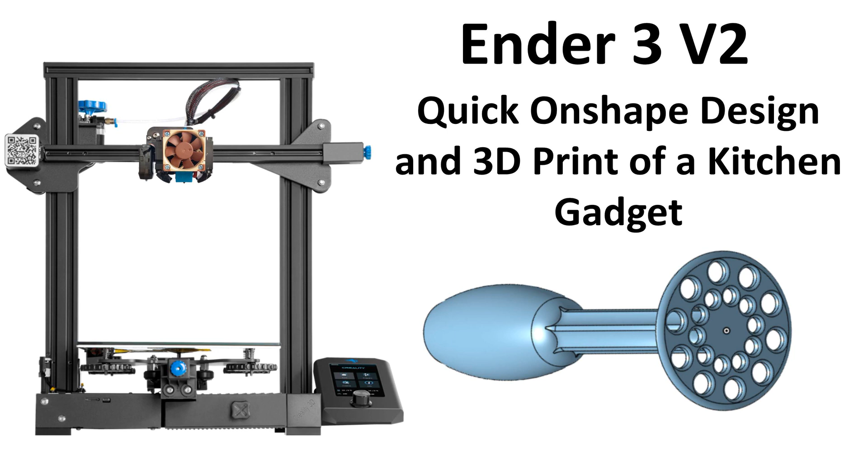In today's video, we're going to be creating a simple kitchen gadget. Every morning I have some berries along with my oatmeal and find myself having to smash these berries using a fork, which is time consuming. And I thought today, hey, you know what? I got a 3D printer.

I'm just going to jump on Onshape, create a simple kitchen gadget that will help me mash these berries in no time. So let's jump on Onshape here. This will help a lot of you guys that are just starting to get into CAD. This is a very simple tool to make.

First thing I like to do is jump on the internet and just try to find some inspiration for my design. I'm looking for something simple that can be 3D printed all in one piece. Something like this, or this one is perfect. So you see this wooden handle here? I like that one. That's a very simple design. It can be printed all in one piece. Doesn't need any supports or anything. So that's what I'm going to do.

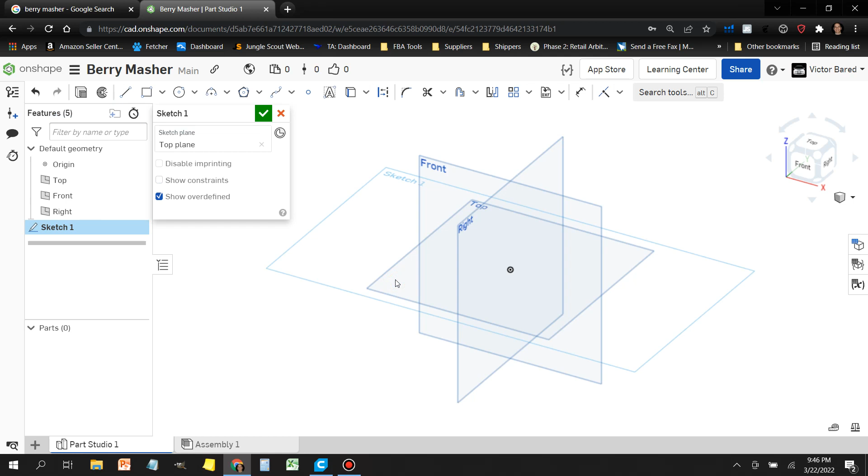Log into Onshape. Change your measurement units to millimeters. And I'm going to start off with a circle sketch. I got this size by measuring the bottom of the bowl. So it's just slightly smaller than the shortest diameter on the bottom.

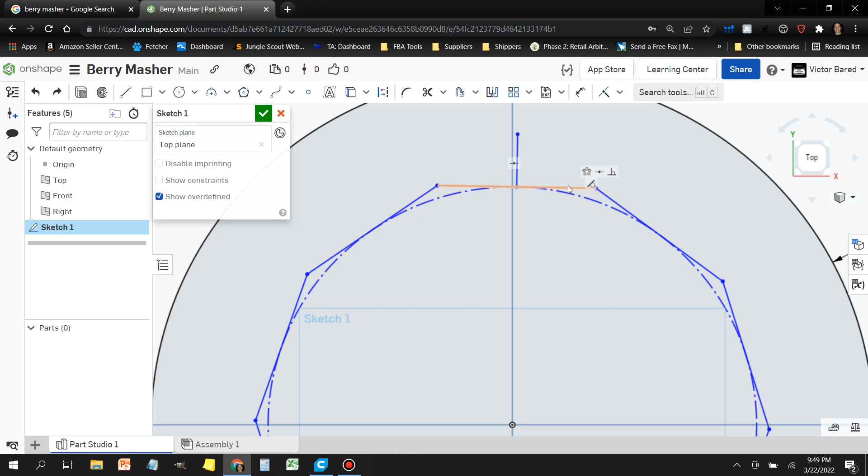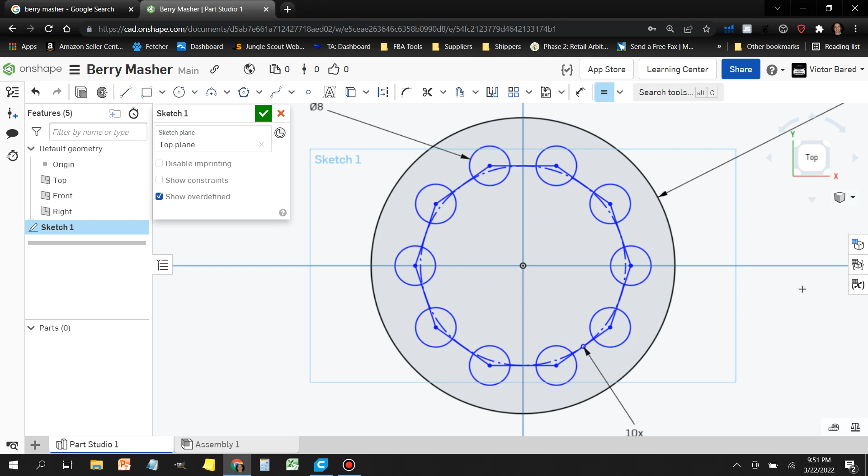What I like to do to make a bunch of circles is I'll create some type of a hexagon. In this case, it has 10 sides. And then I use the points to create the circles. And then I can define one of the circles, and then make all the extra circles around it equal in size. That way, if I need to change the size of one, they'll all update.

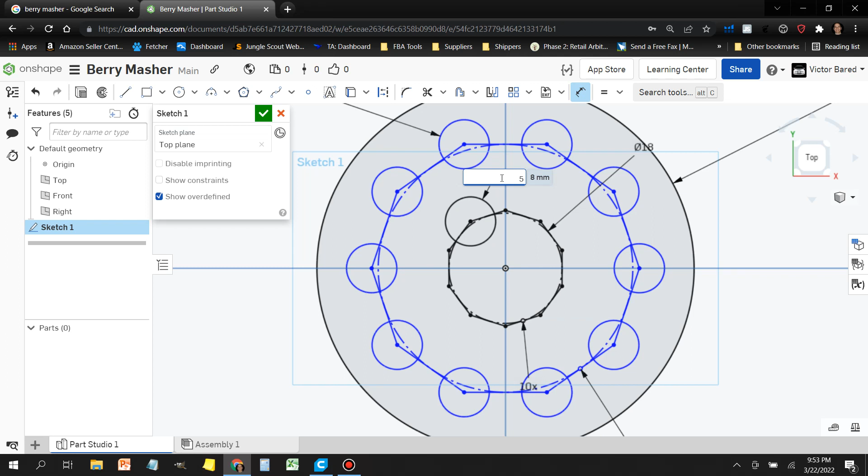And then I'm going to do the same here in the center. I'm going to create another type of a hexagon, align it to the center, give one of the circles a defined size, and then create a bunch of other circles around it, and then make them all equal. The nice thing about doing it this way is that you can change the diameter of the circles. You can increase or decrease the space in between them. And it makes doing this process pretty easy.

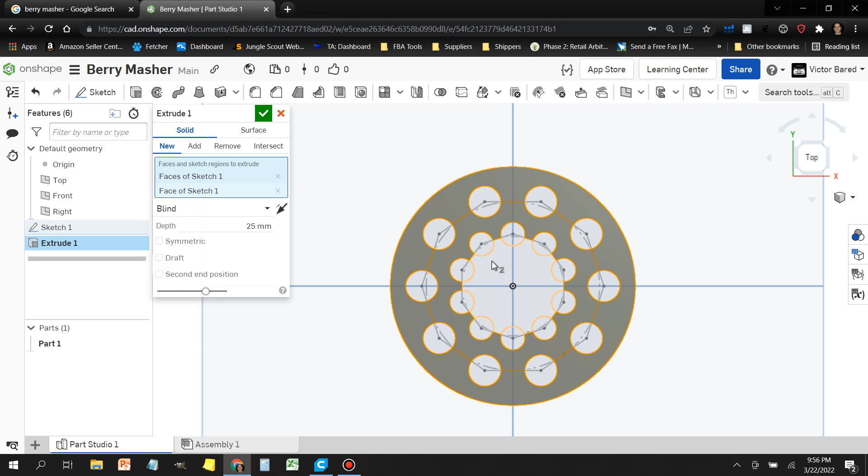Alright guys, so that's enough of me talking. I'll just let the video run here. You guys can follow along. If you want to see the details of what I'm doing, just slow the video down. That way you can see the different tools that I'm using.